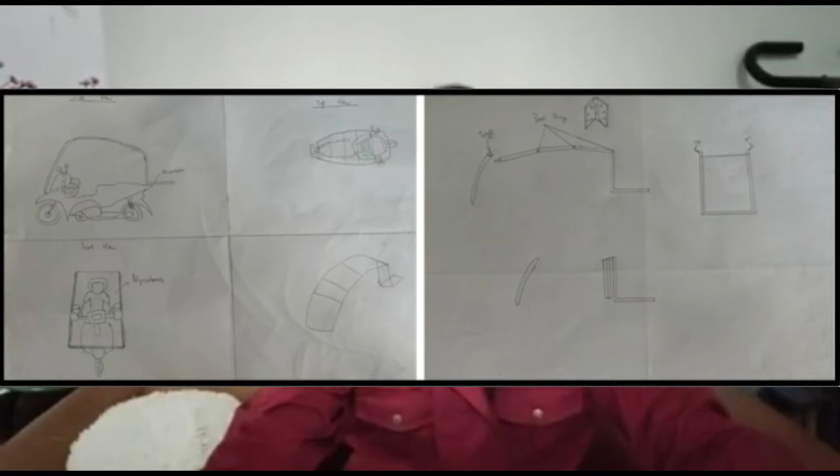For design 2, this design requires fabricating a huge part, which is the roof and the front windshield. The left figure shows the fully extended roof. This roof covers the top side and the front side of the motorcycle. The design can be used even when there are 2 people on the motorcycle, because it has a base at the rear side of the roof. The right figure shows how the roof is kept.

The roof is linked with a door hinge which allows the roof to act as a Z shape when it needs to be kept. The roof is secured with a toggle at the windshield, located at the upper part on the left and right side. The windshield size is quite big, but it can prevent the rider from getting wet.

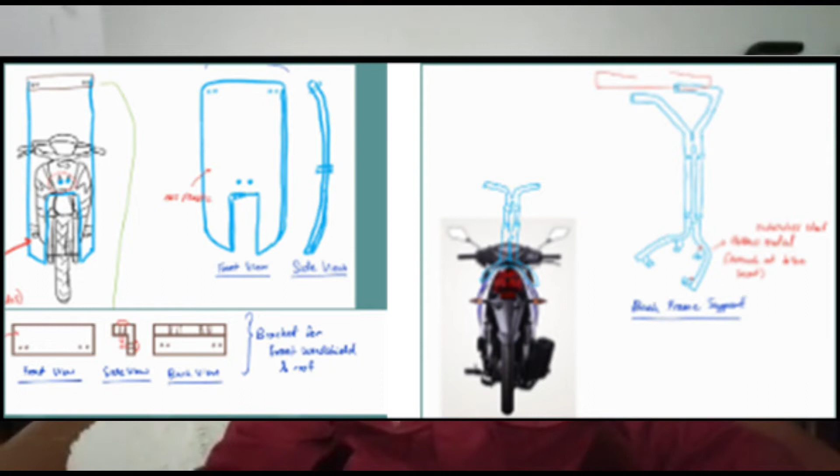And for design 3, the windshield is not straight at all but has a slight curve for better airflow, but this design requires excellent cutting skills. Besides that, this design also has a rear monorack to mount the roof on top. But this roof is not foldable, so it has a problem with portability. In case the rider does not want to use the roof, it has to be removed completely, which may consume some time.

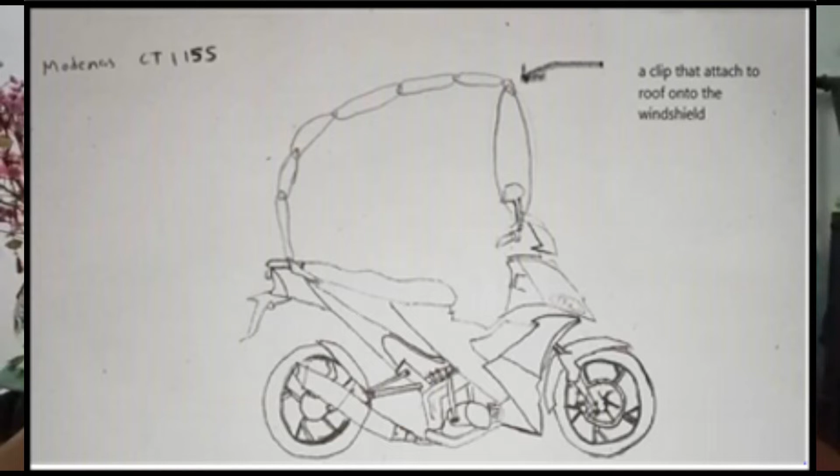Design 4 is similar to design 1, which also has a front windshield at the upper part of the front side and extends the roof from the rear. But this design does not have a box to keep the roof. The roof is attached to a clip at the front windshield when it extends. The roof structure is made of aluminium as well. The roof material is canvas that protects from rain, water and sunlight. Also, this design does not cover the lower part of the front side, but it is portable for the rider.

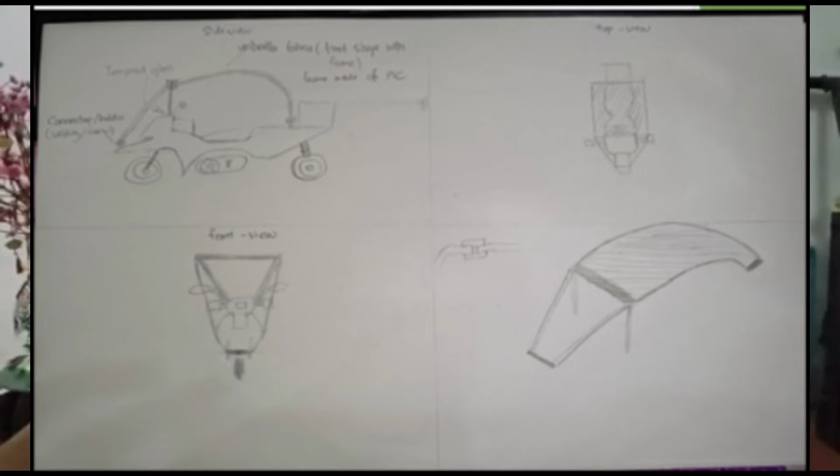For design 5, the front windshield is proposed to use tempered glass, while the roof uses an umbrella fabric. The front windshield of this design is mounted at the front side, but it has 2 pillars on both sides which may cause some blind spots or affect the comfort of the rider. The final design was developed using SolidWorks software. Each component of the design was created separately before assembly.

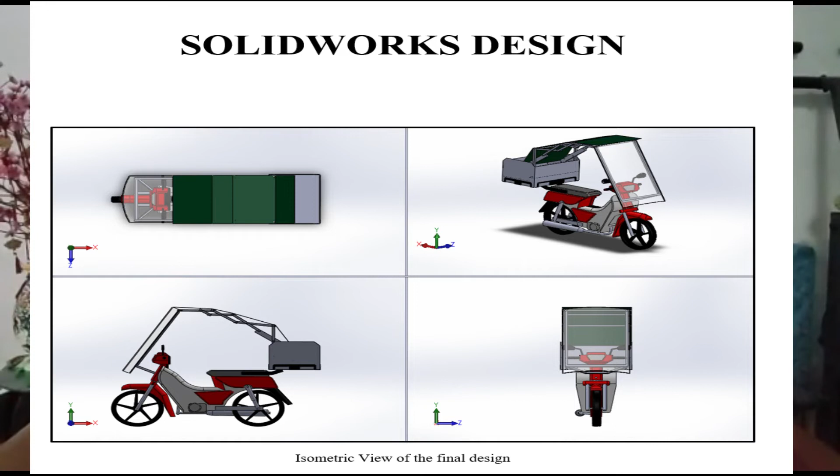Our group has chosen the combination of design 1 for the roof and design 3 for the windshield as our final design after taking a lot of criteria into account, as we discussed. The design 1 roof is mainly chosen due to its portability and it seems to be the most rigid design in terms of the roof. However, it may require a lot of hard work to fabricate.

For the windshield, design 3 is mainly chosen due to its capability of covering both the upper and lower part of the rider. Moreover, it provides better airflow compared to other designs, as it is important to keep the airflow in the best condition to avoid the product taking a lot of pressure or forces during rain and heavy winds. The final design of the product was created using SolidWorks. We have run a few simulation tests for our product: airflow, pressure, drag force and lift force.

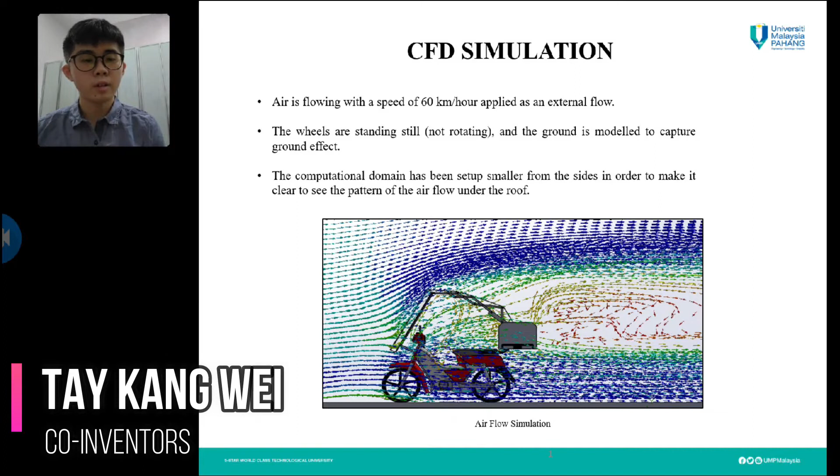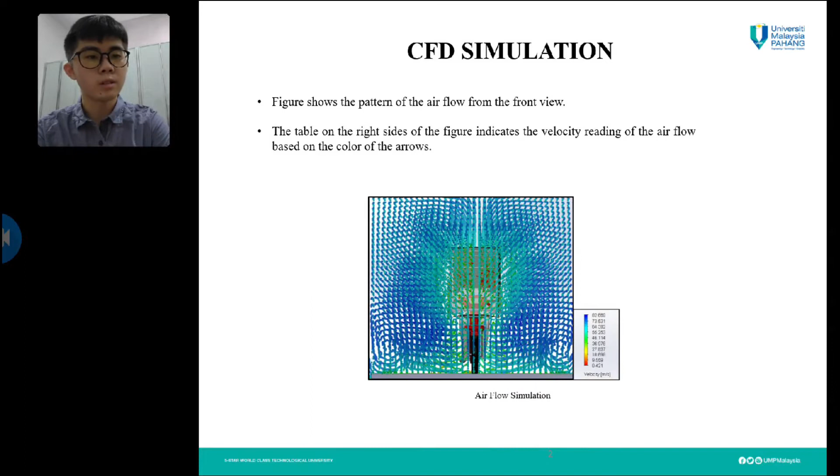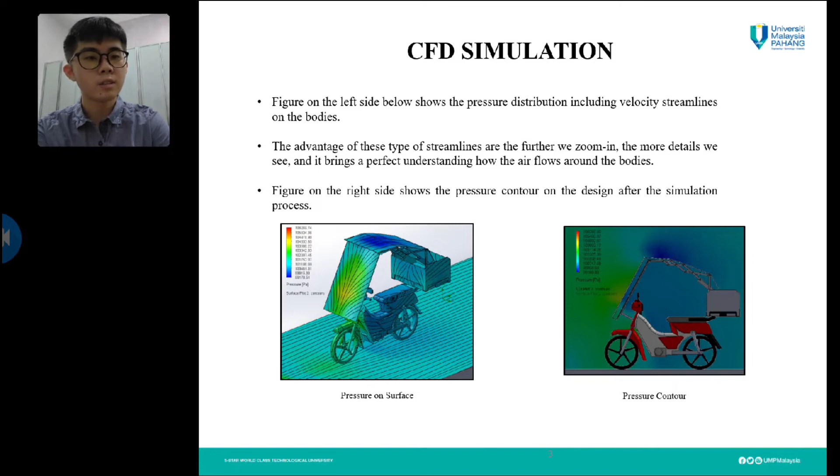First of all, the airflow. Air flows at a speed of 60 km per hour, applied as an external flow. The figure shows the pattern of the airflow from the front view. The table on the right side of the figure indicates the velocity reading of the airflow based on the color of the arrows. The advantage of this type of streamlines is that the further we zoom in, the more details we see. And it gives a perfect understanding of how the air flows around the bodies.

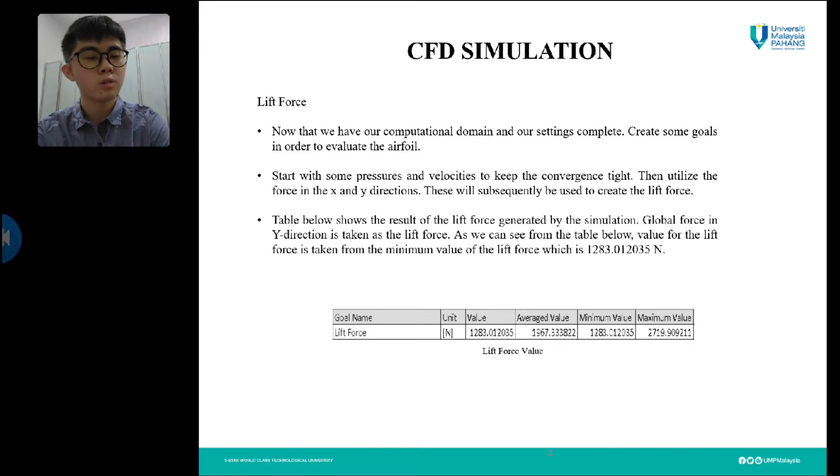Next, the lift force. The table below shows the result of the lift force generated by the simulation. Global force in the y direction is taken as the lift force. As we can see from the table, the value for the lift force is taken from the minimum value, which is 1283.012035 Newton.

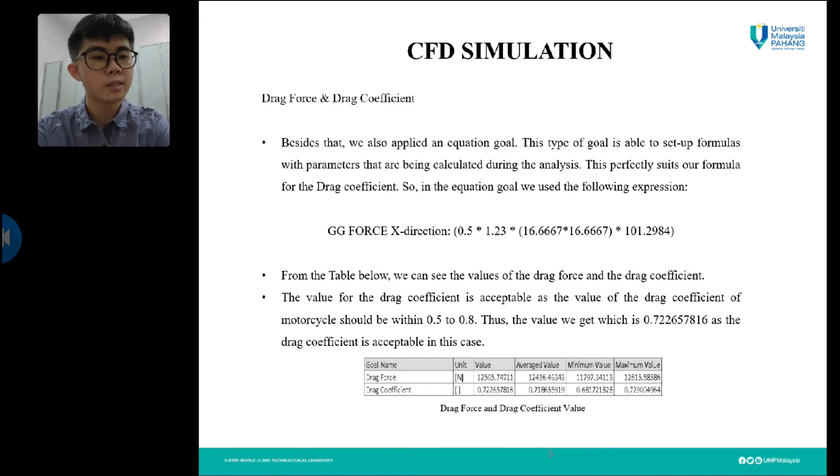From the table below, we can see the values of the drag force and the drag coefficient. The drag coefficient is acceptable, as the drag coefficient of a motorcycle should be within 0.5 to 0.8. Thus, the value we get, 0.722657816, is acceptable in this case.

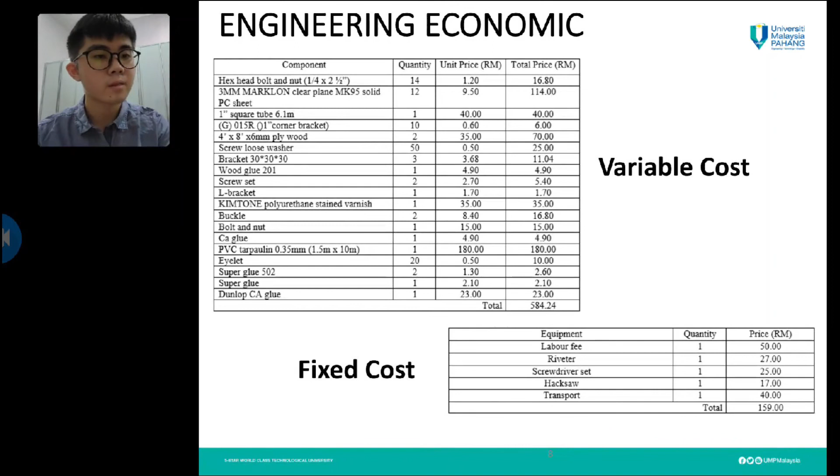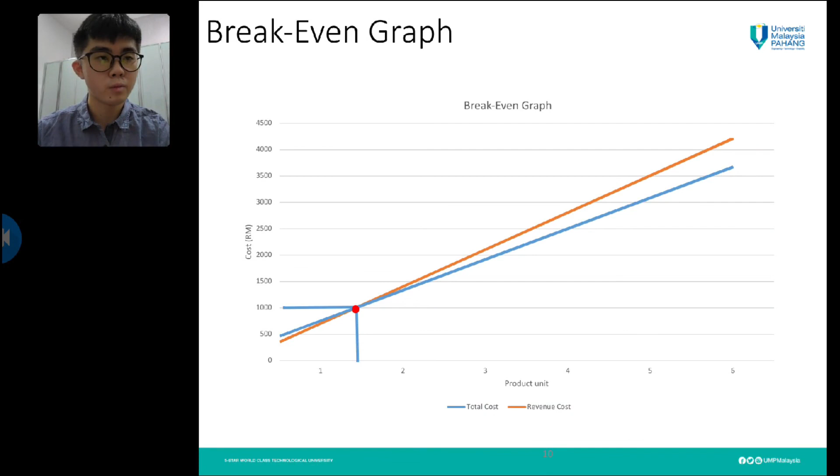This is the break-even graph we obtained for our product, and that's the return on investment. And finally, after the calculation, we have a return on investment equal to 60.92%.